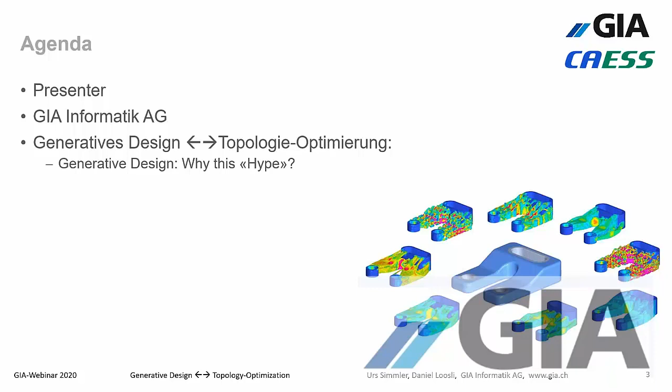I set up an agenda. My name is Urs Simmler. First, I will talk a little bit about me, about GIA Informatik AG. I'm working for this company. Then let's have a little overview about generative design compared to topology optimization, and most of the time we will see live demonstration in a topology optimization solution, which also provides some capabilities to do, let's say, some generative design. And at the end we'll have time to answer your questions. So if you have any questions, please write them into the question panel in the webinar application.

Okay, here is the presenter. My name is Urs Simmler. I'm working for GIA Informatik. I'm doing quite a lot of simulation stuff. Before I started working at GIA Informatik, I was for 20 years at PTC as a simulation specialist, and I'd like to show you some news about topology optimization and generative design.

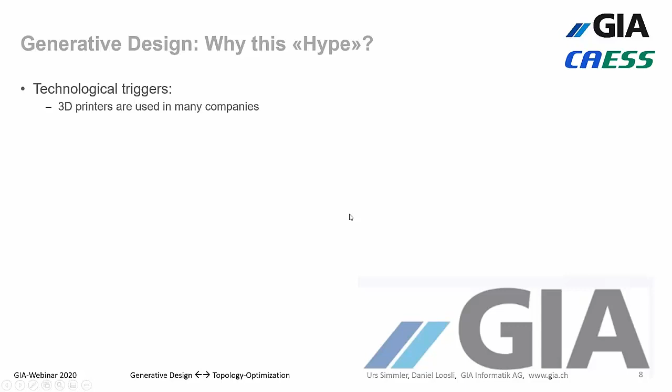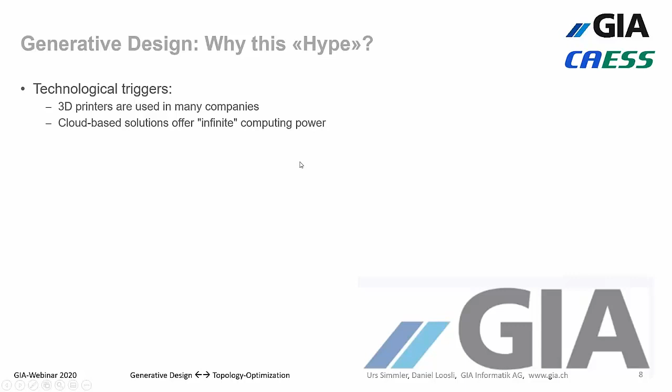Okay, but let's have a look at our theme today, generative design compared to topology optimization. What are common similarities and what are the differences? Why do we talk right now quite a lot about generative design? I think one reason is because many companies have 3D printers in-house and they want to use it, they want to feed it with new material, with bionic structures coming out from topology optimization or generative design. And of course, we'll see quite a lot of cloud-based solutions, and the cloud-based solutions provide infinite computing power, and that's also a reason that we talk quite a lot about generative design.

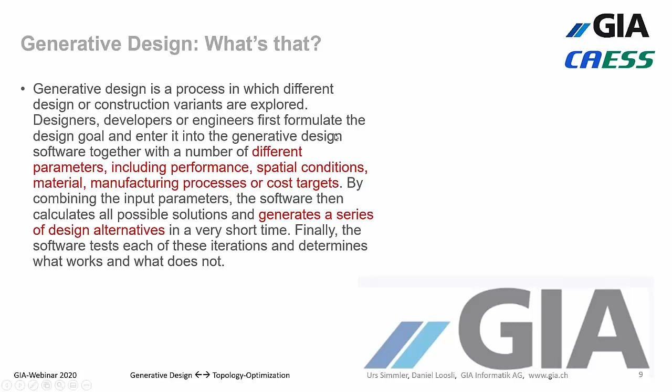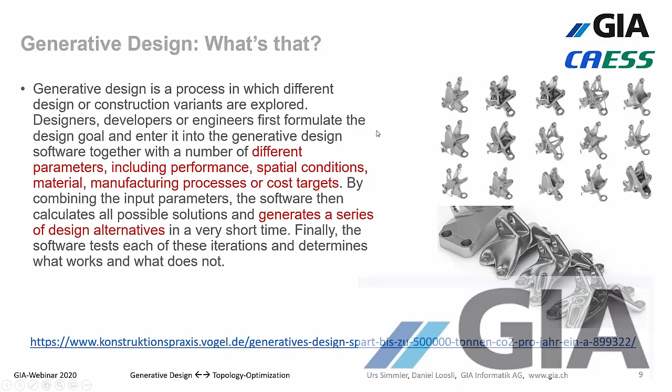And let's say the differences and the similarities to topology optimization are here, but they also have some common targets. Both of them want to create more efficient, better components, lightweight components, stiffer components. And I would say generative design builds on the principle of topology optimization. Topology optimization has been on the market for a long time, 30 years, but generative design came out with cloud solutions starting around 2015. Topology optimization is more a desktop solution, and generative design is in many cases a cloud-based solution because we need a lot of simulation power. And traditional topology optimization brings out one single optimized shape.

And if you compare it to generative design, there we get an infinite number of designs. And of course, both methods take into account manufacturing methods. There is no difference between them. And I would say topology optimization is more user-driven and generative design is a more computer-driven solution. And I think that's a nice advantage of generative design. Quite a lot of them are also using AI, artificial intelligence.

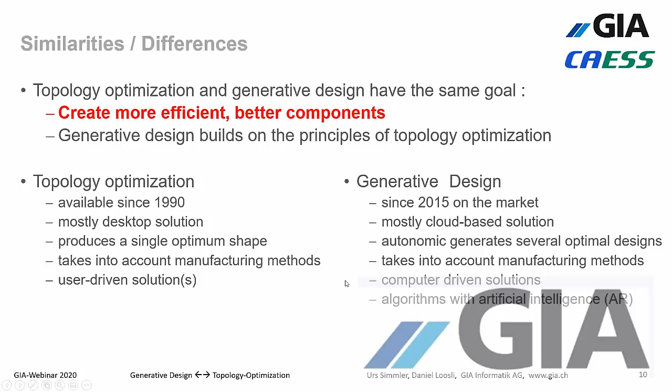Of course, in one or in two pictures, I would say the old way, yes, it's not that old, but it's a traditional way. There is one man, one computer, and you get one optimized design for topology optimization. And if you're looking at generative design, you must have a cloud solution. You must feed your cloud solution with artificial intelligence algorithms and of course with some CAD geometry, and then at the end of the day you'll get many variants of your design.

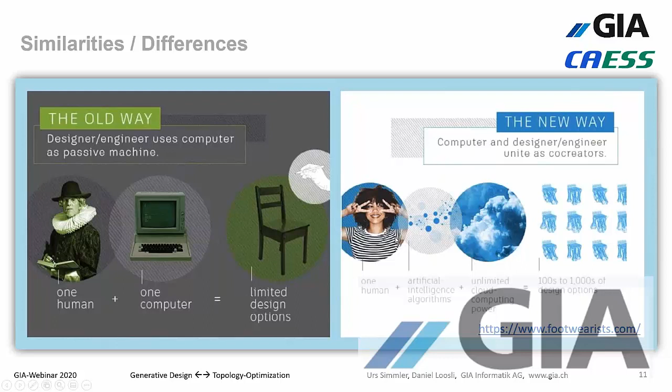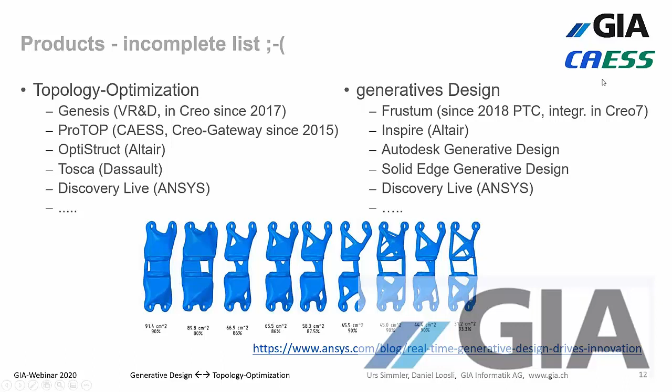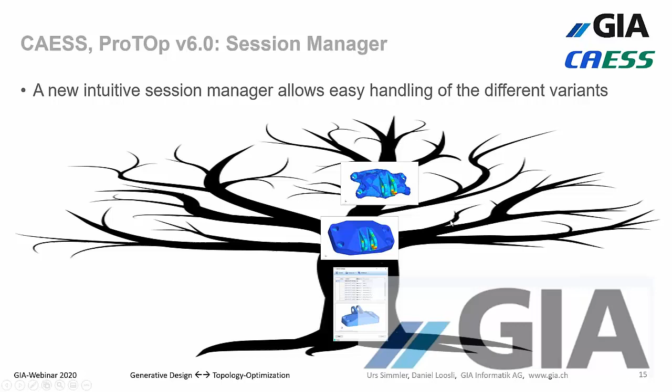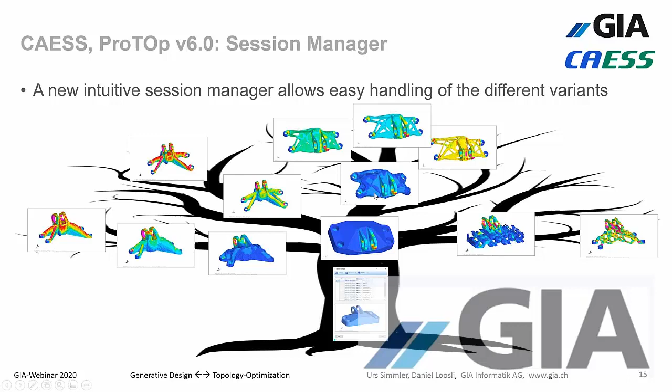But is there maybe a possibility to use the advantages of both technologies? I think yes. With ProTop we can do that, and also with different source data coming out from different CAD systems, because ProTop can be fed with simulation data from PTC or from CATIA or from SolidWorks or Siemens NX or what else. And with the help of the intuitive session manager, which came out in the new version, we can really go into the direction of generative design, we can really create many variants, and it's quite easy to handle them. I will show that quite soon in a live demonstration.

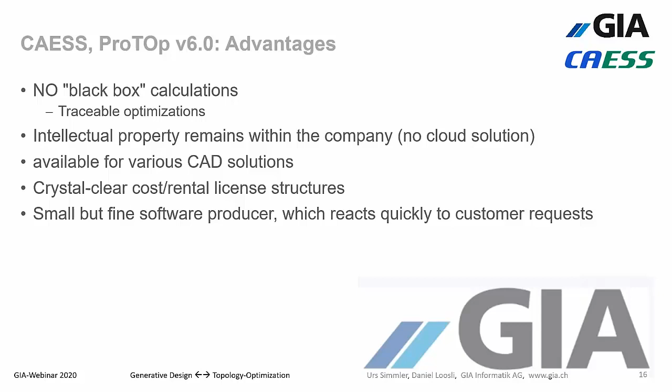And I think the advantage of topology optimization is that we really have a traceable optimization process. We can take influence on it. And one important thing is many companies do not want to send their intellectual property to the cloud. They want to keep their intellectual property, and ProTop can be fed with CAD data from many solutions. You have a crystal clear cost license structure, and by the way, you have a small software factory which can react very quickly on new customer requests. And we'll see the solution is very quick. I'm working with an old laptop from Lenovo, P50, 3.5-year-old laptop.

And we want to have a look at an example where we want to build several variants of a bracket which will be loaded here in these directions. We have 2 load sets, and it's constrained here in that region. And of course, at the end of the day, if we had a little bit more time, we'd get these kinds of variants here. But let's start from scratch with our CAD system, Creo Parametric.

I opened Creo 6.0, and here in Creo 6.0 I designed my design space for my optimized part, and in the Creo Simulate application, in the FEM mode, I just created the simulation features. I created some loads and constraints, so it's constrained on that surface. It's loaded in that direction. This is one load case, and it's also loaded in those 2 directions. And of course here I set up mesh control. The maximum mesh size should be 1.75 millimeters.

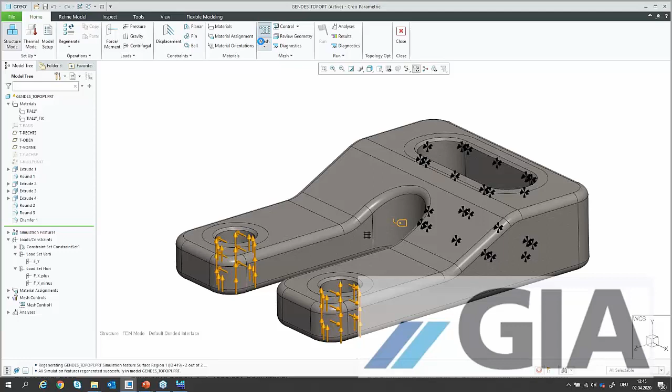I assigned a material here, and I assigned a special material for so-called volume regions. This volume region should not be optimized. This is material which cannot be removed later on by the topology optimization. I'm going to mesh my component. This is taking about 10 seconds. And we'll see here quite a dense mesh. It's needed for topology optimization. This is not Creo Simulate native mode. This is FEM mode where we create that.

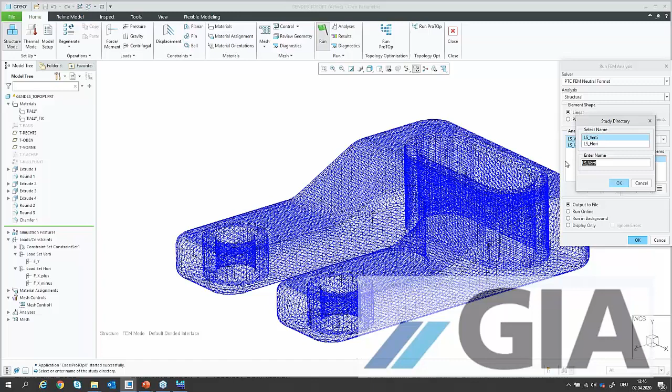And with the help of Pro/TOOLKIT we can also make the gateway with ProTop. I just brought in these buttons here. I could push just that button to send my data to the solution, but I will do it by hand, as you can do it also with other CAD systems. Here I just have to write out an input deck with linear elements. I will write out structural FEM format, and this should be done in a folder called, what should I call it? I call it Max. Okay. And now a file will be written out.

I'm going for my folder here, under the data, and we see there's a folder Max created. I'm getting here an FNF file. This is a traditional input deck for finite element solution. At the beginning you have some nodes, then elements, and at the end forces, constraints, and material information.

This file can be taken now by a topology optimization solution called ProTop 6.0. Here I just open a new project. Under the folder Max, I'm going to open my FNF file, and this will be imported here.

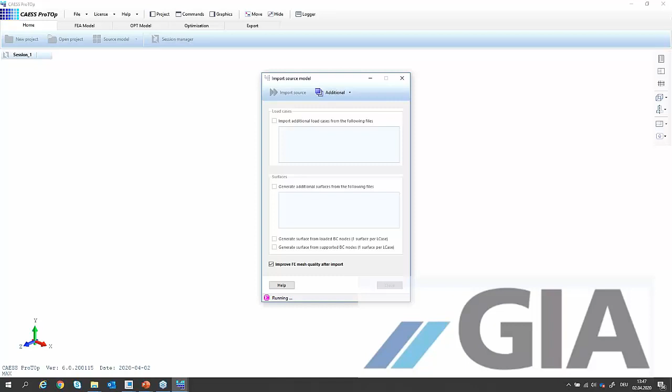So I'm getting information about my design room, about the loadings, about the constraints, material information, and quite soon I will bring in some additional information like technological constraints or all that kind of stuff. Here we can have a project folder, commands can be taken out and so on. It's quite easy to use that solution.

And the most important thing is here the session manager, because with this session manager it's really very, very easy to organize my variants and to go into the direction of, let's say, generative design.

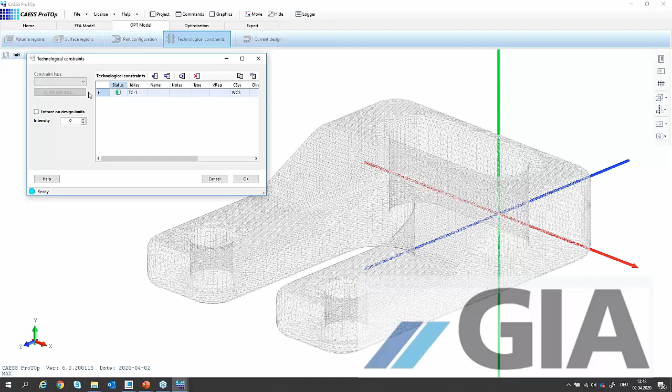So the first thing I'm going to do, I'm bringing in a very easy technological constraint, and with this technology constraint I want to do the following thing here. One moment, I want to create one here. Okay, and it should be a plane symmetry here.

Which volume should be symmetric? Let's say the free volume, colored now in green, should be symmetric to a specific axis, and as you can see it should be the x-axis. We see here this purple plane, blue plane, it indicates the plane symmetry.

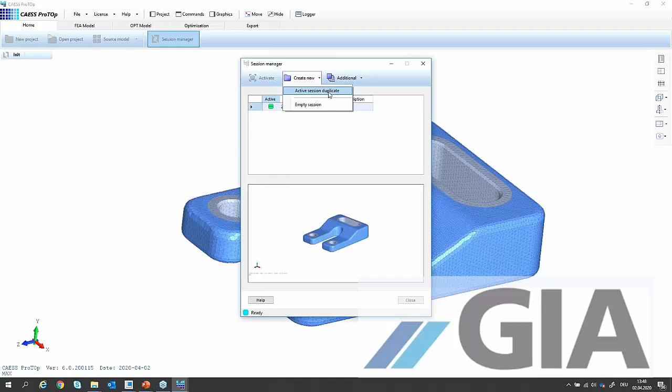Okay, so this is our initial design, because at the end we want to have all our variants symmetric. I'm going for my session manager and I'm creating here a duplication of the active session, and I call it, maybe this is 3D printing, and this should be a very coarse solution here.

Okay, and I'm just hitting here the button. I want to optimize here. I want to perform a topology optimization. Just started it here. I'm going to take away the material quite aggressively, and in that region here I can say, okay, I want to see the geometry, or the stresses, or the displacement here. So it's already calculating.

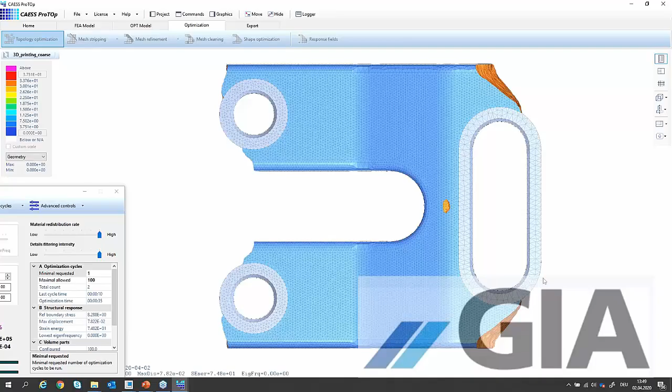Here are the stresses, and depending on the high stresses, ProTop cuts away the regions not needed here. Of course, these regions are not needed for stiffness. Also this material is not needed for stiffness, but the gray material cannot be cut away.

So every 10 seconds, a new cut will be done, and the number of equations are getting less and less. My initial target is I want to reduce the free area to about 50%. I want to bring it a little bit more down because I'm quite close to 50%. My target should be right now, I want to have 20% here, around that one.

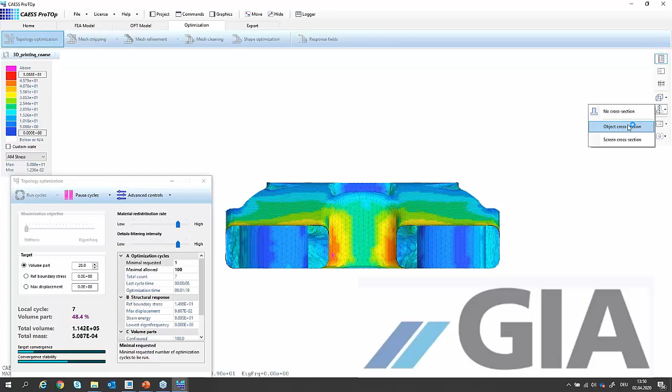And you see, when I'm looking maybe here from front, by creating a cross-section, okay, I can see in my cross-section, I can move that during the optimization process to see what happens. In my component, I can see a bionic design will be created, and for sure this kind of design has to be 3D printed.

So I'm deleting my cross-section, and we can see right now we are around 25% after 12 loops. And the design looks as follows here.

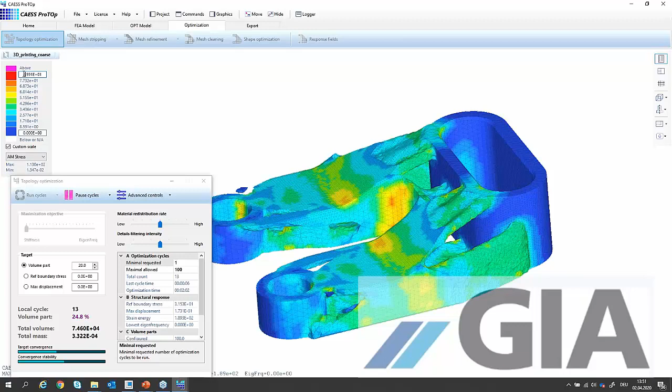We can also bring in our stress legend here to see where we do have the high stresses, where we do have the low stresses here. And I would recommend at the end of the optimization, you should take a little bit less aggressivity here. Yellow means less aggressive, and red means more aggressive, with these two sliders.

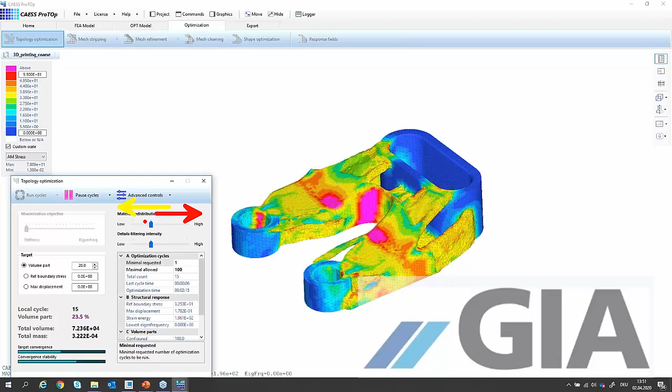Okay, so I'm taking it quite smooth away, and I say, okay, now I want to stop my optimization process. And I think it's also quite important that you see during the optimization what's going on, that you can see the stresses, that you can really influence the optimization process. If you have a generative design solution, you have no clue what's going on behind the scenes.

So right now I have my coarse 3D printable component, but I want to take out some more material. For that reason I would say I need more elements, and therefore I also have the capabilities within ProTop to do a mesh refinement.

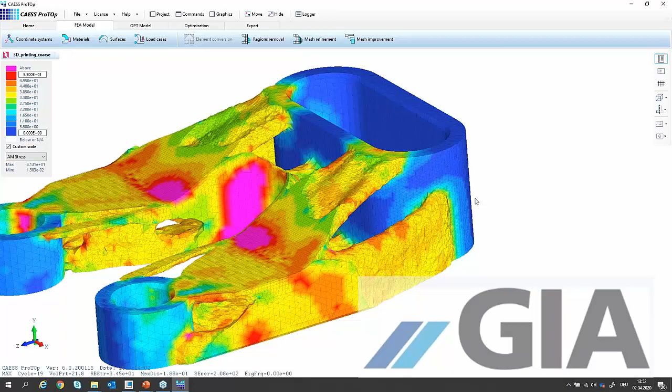I do not have to go back for my CAD system. I can refine the mesh here. With these numbers I say, okay, I want to subdivide the elements above an edge length of 1 millimeter, but I don't want to use more than 7.1 gig of RAM.

Now the refinement will be done, and I'm getting here a new session. So automatically a new instance will be created in my session manager. I can always go back for the old session with the coarse elements, but now I want to proceed with the dense elements. The meshing process is still on the way.

Maybe let's have a look here at the elements in that area. Okay, and quite soon we'll see that these elements will be divided. I hope. Yes, it's doing it right now. Okay, now I have a much more dense mesh, and I will do the optimization.

I will proceed with the optimization, and I will bring down my target to about 12-13%. At the beginning I say, okay, I want to cut out much more.

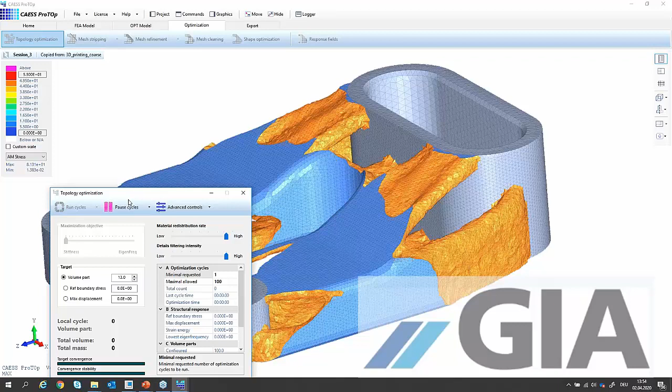Going here maybe back for the geometry. Yes, we can see the geometry here. But now we have the design room with very, very dense elements. And of course, stresses will be created quite soon.

We'll see that the cycle time is coming up a little bit because our number of equations increased. And we see right now the stresses, and now every about 25 seconds, let's say, another cut will be done. I'm cutting away quite aggressively right now.

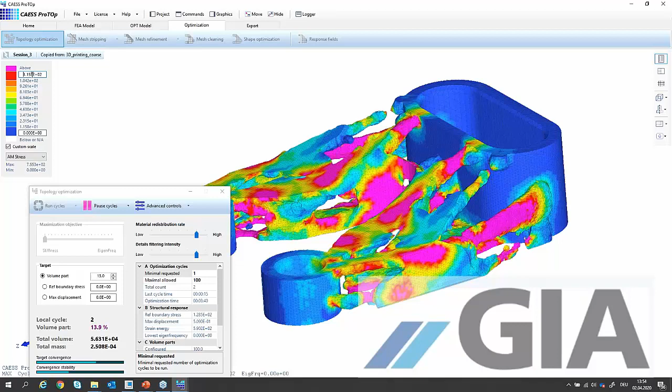Let's do it a little bit smoother here. I'm using my custom scale maybe to have stresses between 0 and 100 megapascal. Let's go here a little bit up. You can also use the mouse wheel to do that.

So you see right now I was in between. I was a little bit too aggressive, so it cut away this bar here, but that doesn't matter. And I can see what's going on right now.

Okay, now a design cycle takes around 15 seconds, and I'm getting here, let's say, a new instance of my geometry.

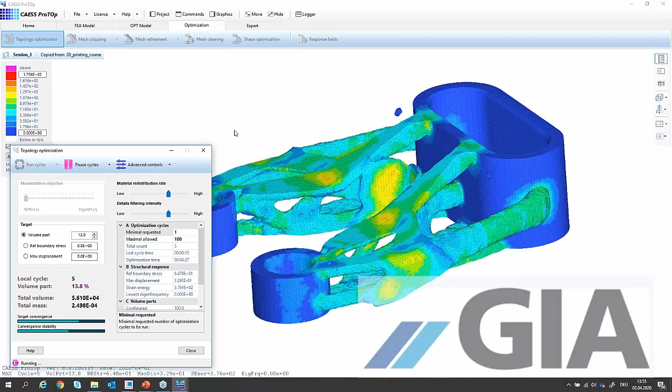Of course, in reality, you have to spend a little bit more time on that, but I will show you later on a solution which took about maybe 40 minutes to create. But I'm quite happy now with my new instance here. It looks quite interesting. And I'm stopping here, let's say, the solution.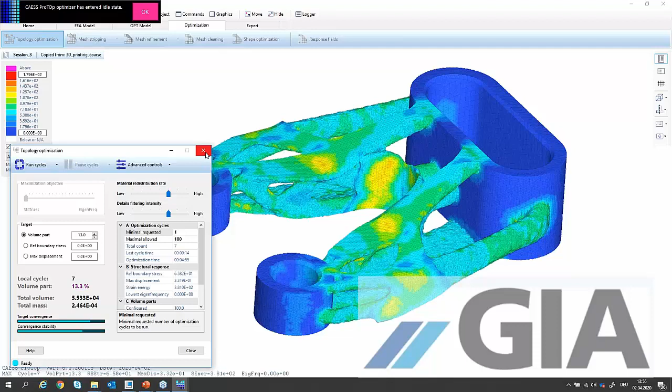You can stop it here by abort immediately, or now it finished, let's say, the last cycle. Okay, I'm having here right now a new solution. This has to be 3D printed.

But now I want to create an additional instance. I'm going for my home tab. I'm going here for my initial variant, and I'm copying the initial variant. I'm duplicating it. So okay, this may be the

variant I want to create with a laser option. And therefore I'm bringing in here additional technological constraints by maybe copying one. I can say, okay, I want to bring in an additional constraint, which is, oh, I don't know what here, I do not understand this option. Therefore, I have a nice help which explains everything to me.

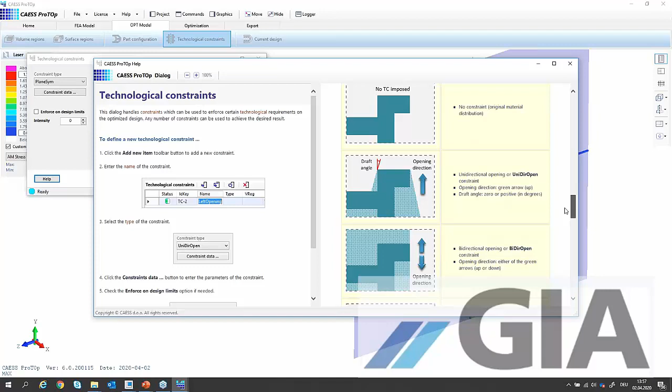And I'd like to create here a bi-directional open constraint. Okay, that means it can be milled or lasered. So I'm doing here bidirectional open. Of course here that one bidirectional open. And I want to use the same constraint data.

No, not really the same because my plane has to be changed. It has to be perpendicular to, let's say, this plane here. Okay, and with this new technological constraint, I'm going back here for my topology optimization and I run it again.

Maybe you noticed here that I still have, or have again, let's say, the coarse mesh in order to pre-optimize my component. Later on, if I really want to optimize, then I'm bringing in an additional dense mesh on it. Of course, we see here the stresses, and at the beginning I want to cut away the material quite aggressively.

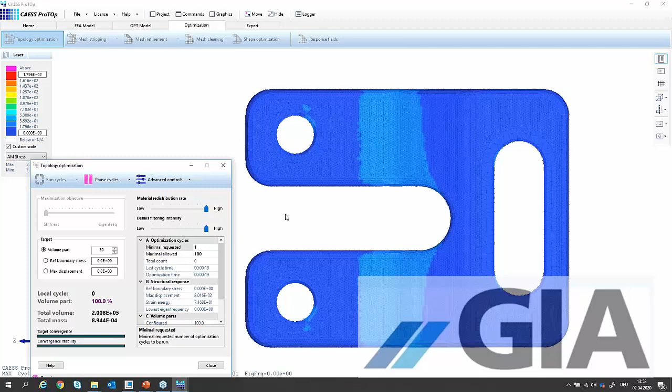Okay, this is done right now, but now you see, okay, the cuts are here in an order that we have like a laser option here. So the cuts, or it will be milled, or I would say I'm using a laser to take out the material. Okay, our target should be, we want to go in the direction of

35%, something around that. I'm reducing the aggressivity, and I can see here some cuts, of course, and later on to create such a component will be quite easy because you just can, let's say, bring in sketches with that cut shapes in your CAD system.

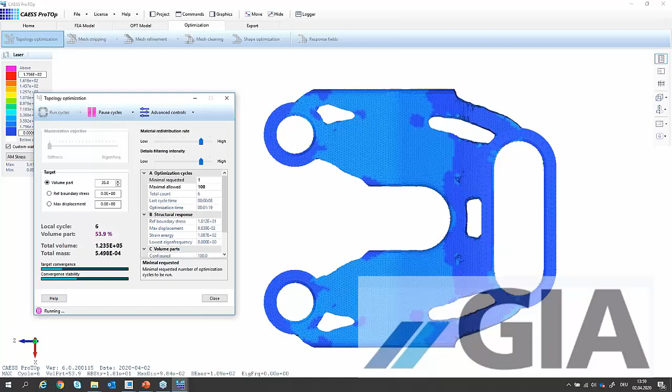Okay, we have here the solution. We can bring down the stresses or the legend levels with my mouse wheel, and I can really see what's going on in my part. Of course, it makes sense to do it a little less aggressive to get a nice solution. The sliders are moved to a position depending on the density of your mesh inside the component.

But we see a very interesting solution here which can be milled. I would say we understood this principle. I'm going to stop this run here, this variation creation. It's doing the last cycle, and I have here a nice solution.

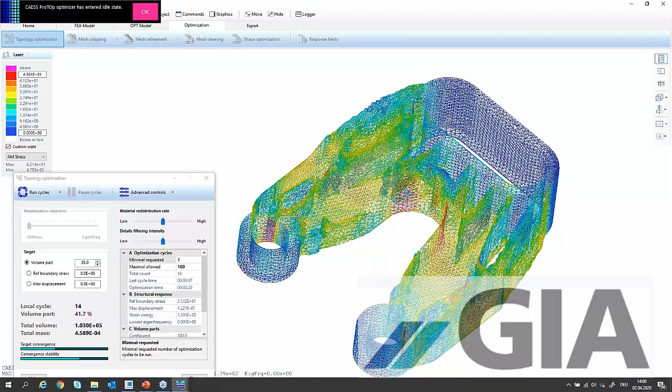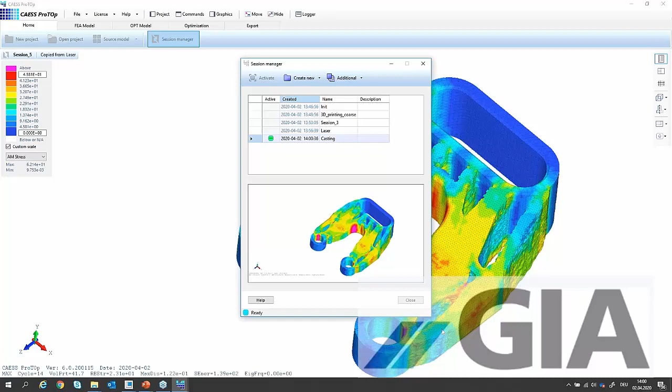Okay, but now I want to create a solution which can be casted. Going back to my session manager, I'm creating an additional copy here. I say okay, this guy here is casting. Let's delete this information. Okay, and you see here the old solution, but casting is right now with the standard.

If I would start here with my optimization model, it would start with the pre-optimized model from the laser option. But by taking the configure design and making it current, it will start from scratch again, of course, using also the technology constraints.

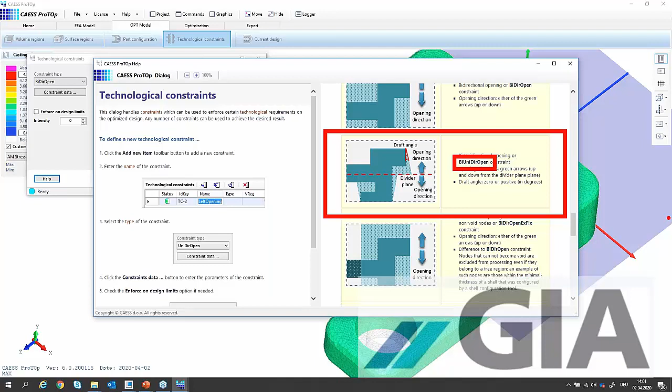I'm going to change now my bidirectional open technology constraint to a constraint for casting. I can see in that nice help that I should use bi-unidirectional open. So quite clear for me, take here bi-unidirectional open. And the constraint data is nearly the same.

The only thing I can bring in is an additional draft angle. And maybe as an additional feature, I'm moving up my plane for the draft angle to a level of 7.5 millimeters.

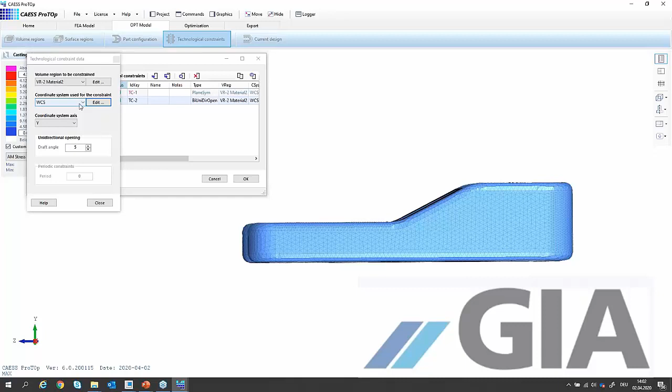Therefore, I'm creating a new coordinate system, and I'm moving that coordinate system by 7.5 millimeters here. Okay, you see it moved 7.5 millimeters, and I shouldn't forget to activate the new coordinate system. Now here, starting from that plane, we should see draft angles of 5 degrees.

Let's check that by starting topology optimization again with the same target, starting from scratch with the full model. We will see that it's cutting away. Maybe we can see it a little better from that view. Okay, let's use that view.

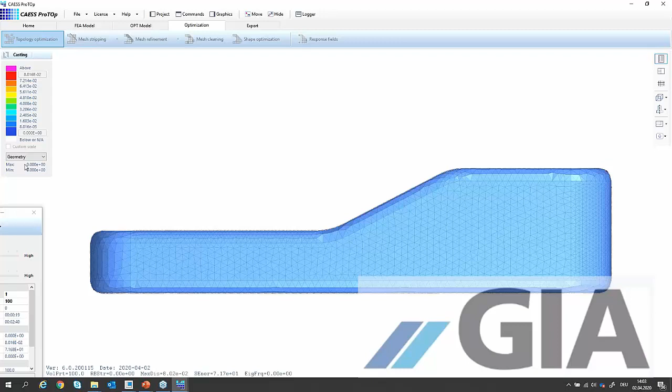Let's see maybe the displacement. Let's see the geometry here. And now it should cut away a little bit. Let's do it a little more aggressive at the beginning. Okay, and here we can see there is draft angle.

Okay, now we see it better. Here we see we have the draft angle until here, or here we see it better, here and here. And of course, if you are watching our part from top, now we are watching from top, we see that we can pull away the casting form here. Okay, so also interesting.

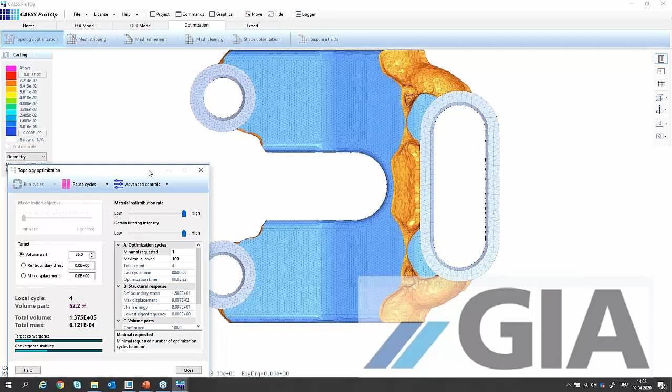Geometry will be created. Let's do it a little less aggressive. Okay, and if you watch from bottom or from top, we see very, very interesting bionic shapes. Geometry will be created, around 39%. Oh, that goes very, very fast.

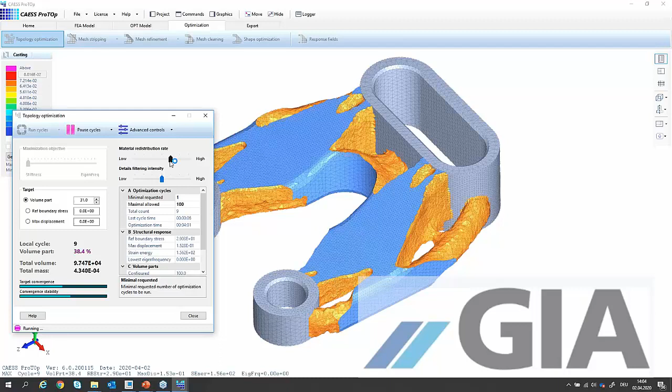And I would say we're going further down to a target of 31%. Of course, you could also use as a target the boundary stresses on the yellow surfaces here, or you could set as a target displacement on your part. Okay, we have here this kind of solution.

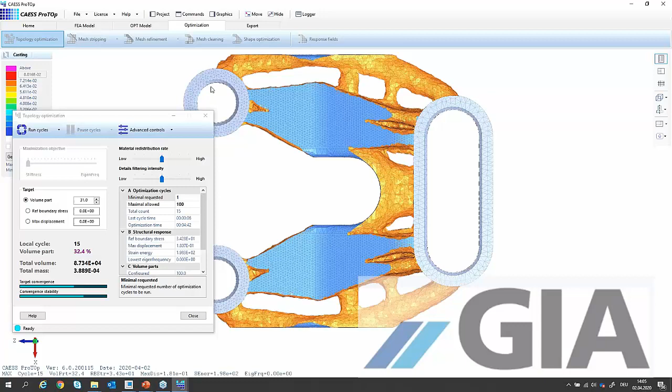And we pause our optimization process. Of course, an additional mesh refinement can be brought on that geometry to do the final optimization. But now I want to create additional variants here because I have a 3D printer. I want to use maybe some so-called lattice structures.

And to be able to do that, I'm going back to my session manager. I'm activating my initial design room, and I'm copying the initial design room. Okay, and this should be a 2D lattice variant.

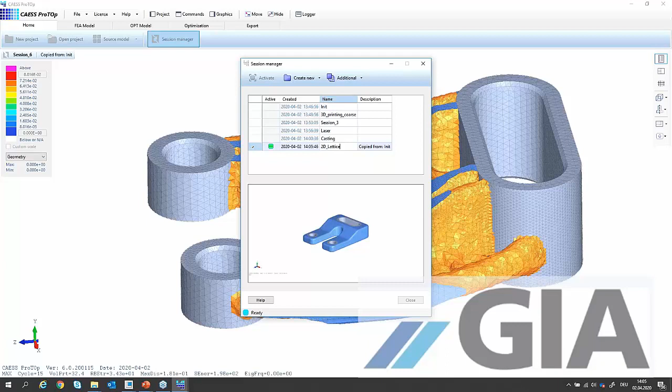Okay, because I started from initial here on the optimization model, I only have my plane symmetry constraint. Here I could also suppress or activate them. Now this plane symmetry is activated, it's green, and I'm creating a new so-called part configuration. Here I have a capability to create solid, shells, and lattice configuration. I'm using right now a lattice configuration.

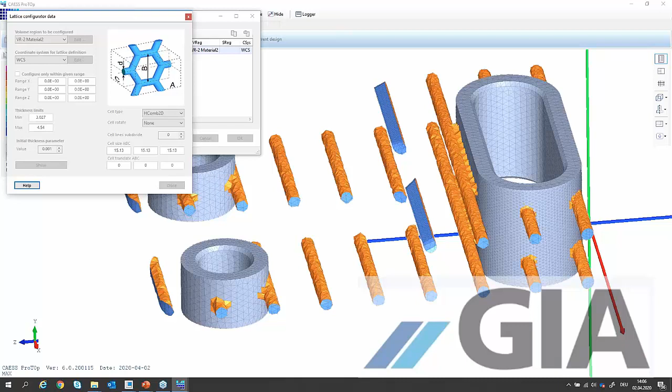And which kind of lattice do I want to use for this green region? This one. No, this doesn't make sense. I want to use here maybe a 2D honeycomb solution. I'm showing then. Oh, in that direction doesn't make any sense. So I spin it around the A-axis. Then it looks like that here.

And as soon as I'm bringing in here in that direction a 0 value, an extrusion will be created. And maybe I'm using a cell size of 15 to 15 millimeters. Okay, it's looking like that here, looking from top. And of course here I'd like to have a closed loop of that cell. Therefore I should move my coordinate system a little bit, and that can be easily done by bringing in here a cell translate of, let's try 8 millimeters. Okay, and this looks quite nice.

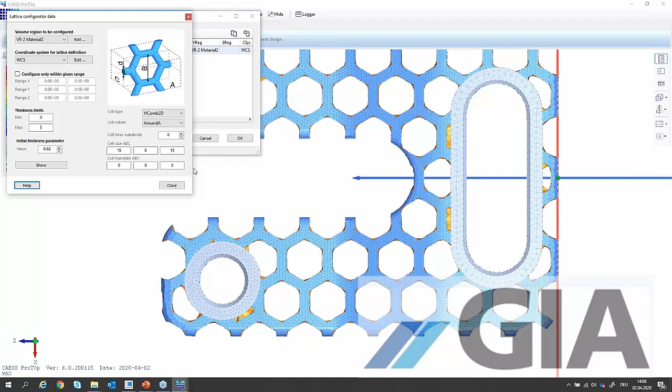I'm defining maybe here a maximum thickness. This is the cell thickness of 5 millimeters, and by bringing in a minimum thickness limit of 0, the cell can be taken away. Right now I see the maximum value here, and by bringing out the initial thickness parameters I can bring a little bit less material for the starting position.

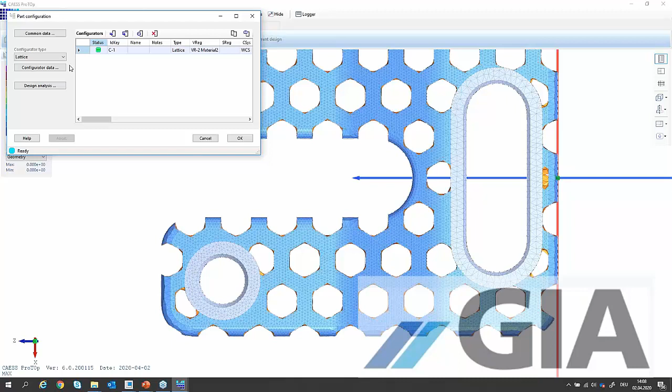I'm starting with the full model here, okay, and now I'm going for my... will be cancelled. I have to, okay, one moment, common data, configuration data. Now everything should be okay. 05, okay. Everything okay, and I can see here on the current design, I'm analyzing my current design, I can see my configured design, I can make it current.

Okay, and I'm starting again my optimization here. The target should be around 24%, and I'm running the cycle. Of course, now my design room includes around 58% of the elements, so my calculation will not take that long. So one cycle takes around 10 seconds.

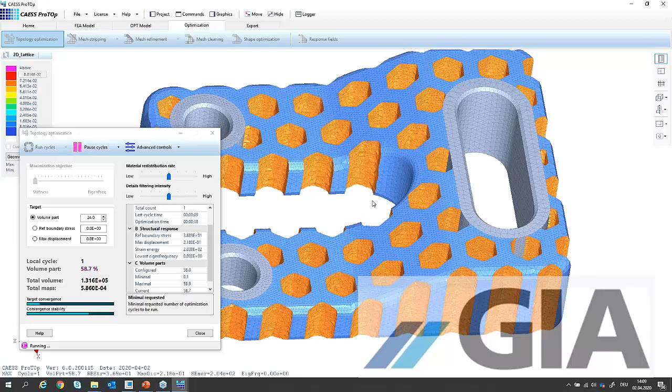But quite often when you have these lattice structures, it takes at the beginning 2 or 3 cycles until you really see where it's starting to cut, because it's quite difficult for ProTop to find out where are the areas where it can start to cut away the material. Of course, you see here a slight change of the volume of the free area, and quite soon, I hope. I cross my fingers. Yes, I think it starts right now here. It takes away the material in that region. Of course, in that region no material is needed.

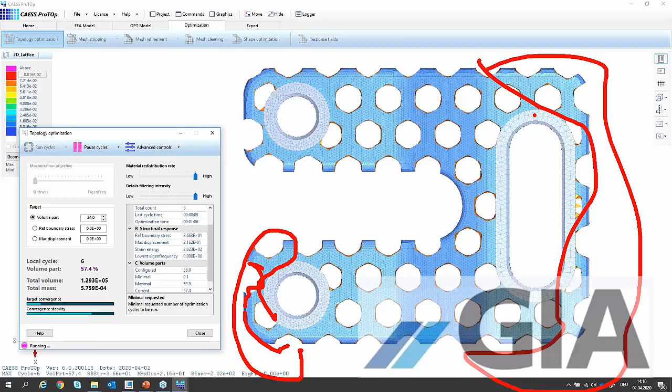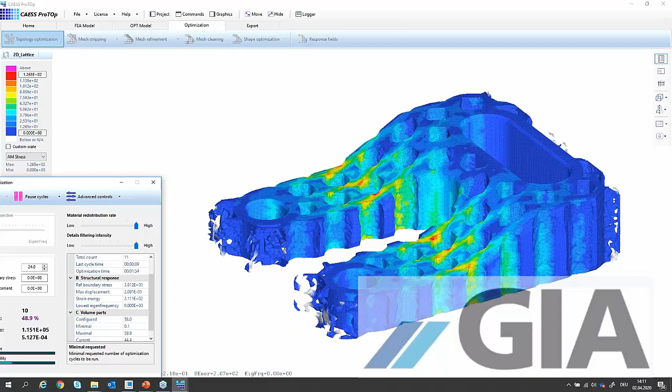Okay, next step. Local cycle 7, taking away additional material. Now, come on. Now you see here the thickness of the lattice structure is removed more and more. And of course during simulation we can see the stresses or displacement or what else. And we are creating right now an optimized part with a 2D honeycomb lattice structure.

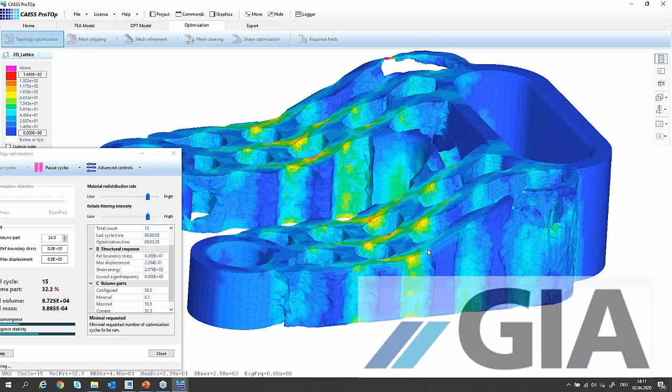Okay, target 24%. Let's be a little bit more careful. Okay, and let's watch here the change of my design. And I think quite important is that you really can see what's going on in that optimization. You can take influence. During the optimization, you can change your target. You can go back to a certain variant or a certain cycle and start again from this cycle.

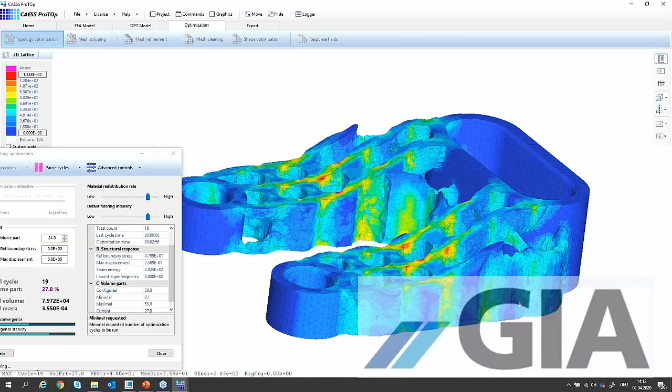So there is really a big flexibility, and as I mentioned before, you do not need a cloud solution or infinite calculation power. An old laptop with at least 16 gig of RAM is enough. Now we see how ProTop is cutting away the material, and it's creating in that area quite interesting lattice structures.

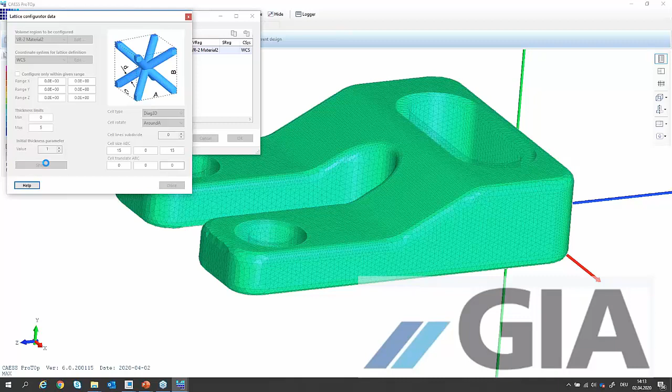Okay, I think we understood that thing, and I'm stopping here again, and I want to do the last variant. Therefore, I'm going back to my session manager. I'm duplicating that one. Okay, and I'm changing here the part configuration. I want to use another lattice. I want to use the 3D lattice, this one here, with switch options, something like that. Let's do here 0, and let's show it. Yes. Is it 3D?

Yes, I forgot here to bring in that value because I want to have really 3D. Okay, and now it's looking a little bit more interesting. Okay, and I just want to use this configuration to start over. Therefore I'm going for my current design. I'm going to analyze it. We'll see, let's say, the pre-optimized design from the last session. By clicking on that one, configured design I want to start, and I want to make that current.

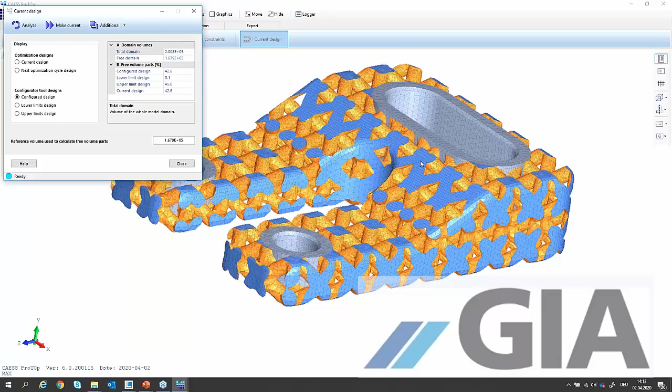We'll see, okay, that's looking quite interesting, and therefore I'm going back for my optimization tab, and I'm running the cycle again. Okay, and I will see, let's say, the same behavior here. In the meanwhile, I'm going back for my Creo Parametric and just want to show you that one here. So I did the optimization in ProTop. I loaded here, let's say, the half of my faceted design, and by using a freestyle feature, I created, let's say, this area here.

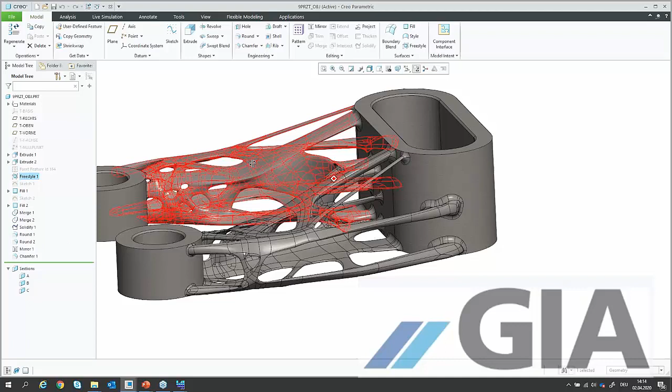And of course, then I made a solidify. I mirrored it, and it took me about half an hour to create out of that faceted model this, let's say, freestyle model. And also this freestyle model, I was taking it into Creo Simulate.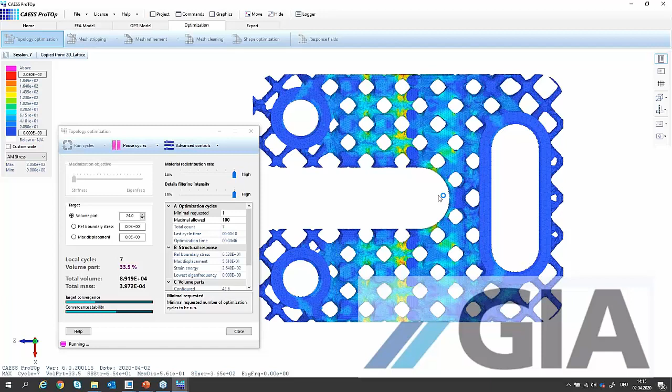And here under, where is it? Under applications, a moment, simulate here. We can see also the results. In the meanwhile, ProTop is cutting away here, let's say, the areas not needed. Oh, it took a while, so I can go back for Creo Parametric, and that was the wrong one. I went to the old topology optimization of Creo Parametric. I want to go for Creo Simulate. This is the button I was searching for.

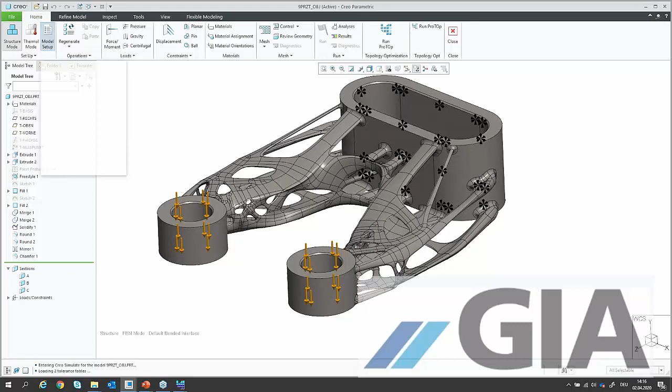Okay, and here, out of my analysis I created, I can see here also the results. Let's do here the results. Oops, that was the wrong mode. This is live demonstration, so I have to change the mode here to native mode. And then in native mode I can see here the results. Sorry for that confusion. And let's see here maybe the stress results. They will be loaded. Okay. This is, let's say, the validation calculation in Creo Simulate.

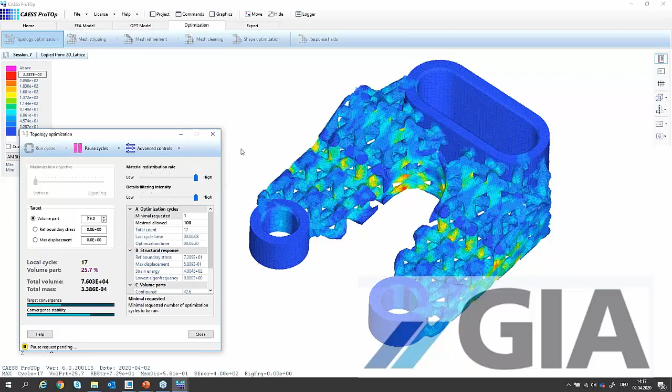But in the meanwhile, yes, it's cutting away the materials, and we are quite close to our target of 24%. And here we see these interesting lattice structures. Okay, but that's all for doing generative design with the topology optimization solution from ProTop. So I'm stopping this solution, and I think you saw that it's quite intuitive creating these different solutions by using this session manager. With the session manager you really see what's going on, and you can take additional projects, copying them and starting over with them.

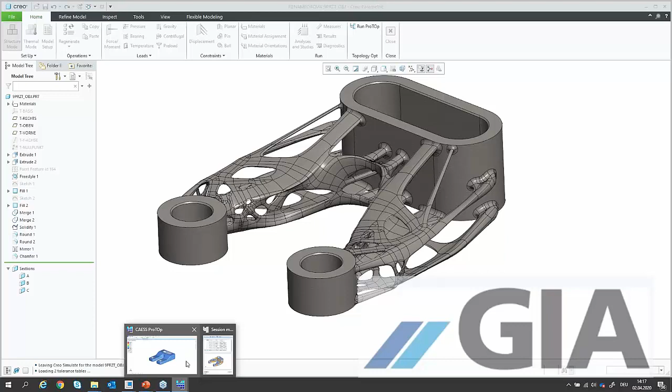As I do it right now, I'm opening a project here, open project. I did that, I think it was Tuesday. I called it live, so opening the live project, and here we also have the session manager. And I see this is the solution I showed you before in Creo Parametric. So I just click on that one. It's active. Okay. And I say right now, let's go for optimization. And then I see this behavior, and I can start over.

I can add here material, or all that kind of stuff I want to do is possible. So I run the cycles again, and I say, okay, I want to create here maybe a new instance with more material. Therefore, we'll see quite soon an additional step here, and I hope that we'll see that it's adding material. It is taking maybe 20 seconds. And so it's really very easy to handle all these different variants here. It's running.

Let's wait another 5-10 seconds. Come on. Let's do that cycle. This is really live. Here I can abort it if it's taking too long, but I'm waiting another 5 seconds. 1, 2, 3, 4, 5. So I'm aborting this process. It's taking a little bit longer. Don't know why. Okay. And I'm going back for the Home tab.

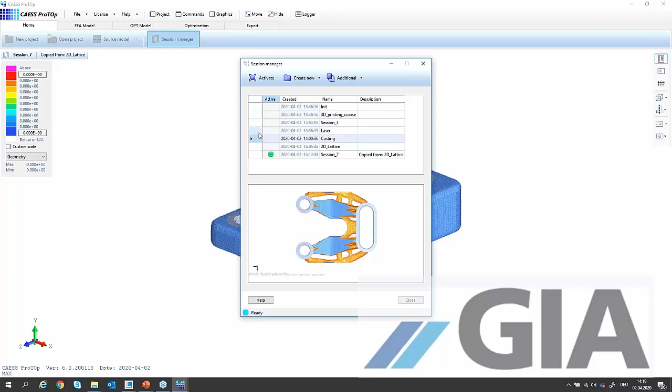I'm opening the project Max. Okay, and in the session manager here I can see maybe the initial one or the casting one. Or which one? Laser session. I'm taking that one. This one I like, so I'm activating it. I just want to bring over that geometry. That geometry should be taken back to the CAD system. I just say, okay, I want to smooth the surfaces. Okay, checking those surfaces.

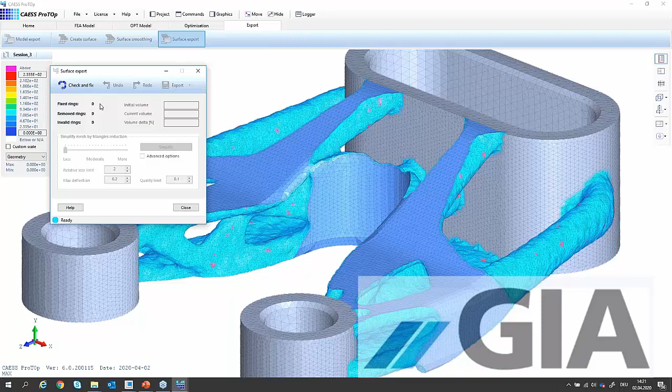Okay, I'm zooming in a little bit. I'm selecting the surfaces and I'm going to remove some peaks. Okay, refine some triangles. Smoothing the surfaces a little bit. And simplifying the surfaces a little bit. So, okay, I'm satisfied with that one. And I'm taking the step to export the surfaces. I'm checking them, and I want to export them.

Export surface, Max, STL, save on the data. So now I hope it's created, and let's create also an OBJ file, saved on the data.

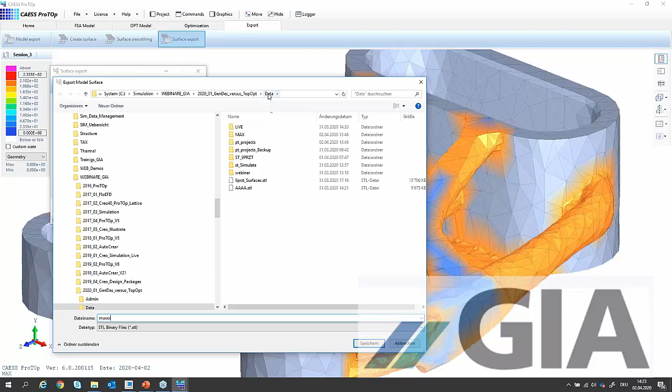Oh, it's going to max. So now I see why it didn't work. Okay, so, stupid guy, sorry for the confusion. Export surface again for STL. And let's do maybe max STL, and on the data it will be created right now. Now it worked. And I'm going back to the CAD system.

Okay, and here I could just say, okay, I want to open all objects. And here we see the STL file. Okay, a new component will be created. Of course, if I had taken, let's say, the dense mesh, it would look much better. But with the help of that one, I could, let's say, recreate my part, or I can do the following

thing here. I'm creating a new component, and I'm going for the freestyle option here, and under the freestyle option there is a possibility to import the OBJ file. Okay, and this guy will be taken into Creo Parametric, and then you can, let's say, take them and delete some surfaces, move some points with the freestyle option. This is also taking about 2 or 3 minutes.

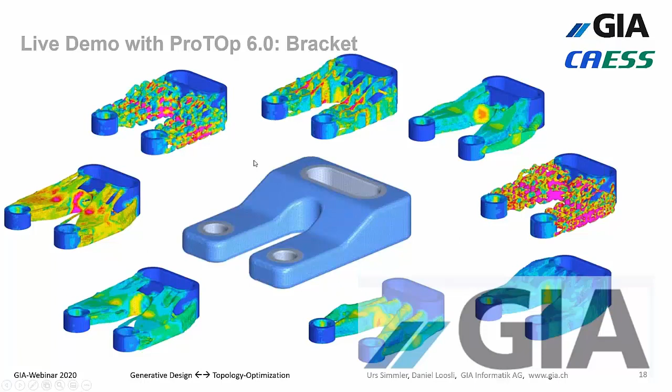Therefore, we are at the end of the live demonstration. We saw how we can really create a lot of variants in ProTOp with the session manager, and that we really have a solution where we can do topology optimization and generative design on a simple desktop without sending, let's say, our critical data to a cloud solution.

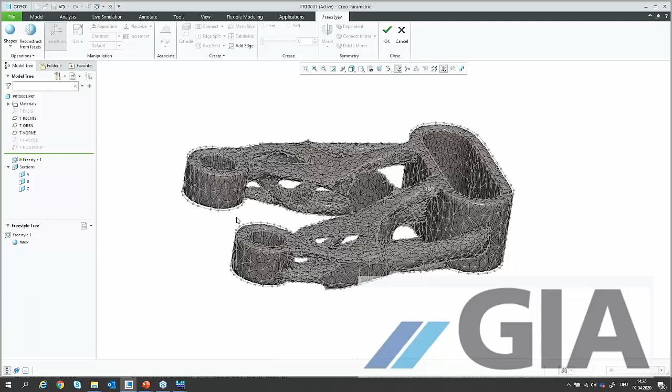In the meanwhile, I can maybe watch this guy here, still creating the surface, as it created it right now. Of course, right now we have quite a lot of, let's say, small cuts inside, but I would say it's not that bad here. And with that import in freestyle here, we can do, let's say, the validation calculation. We can really use that guy for further investigations. Okay.

Let's go back to the PowerPoint here. Let's have a look at the questions. There are questions: how many processor cores can be used efficiently? Right now I'm using all, let's say, the cores. I'm not sure whether there are some options where you can say I just want to use some of them, but especially during, let's say, solving

of the equation system, all of the cores will be used, and that's the reason why this solution is very quick even on an old laptop, and therefore I think it's really a very cool solution. And another thing is it never crashes. I'm working with it now for 3 years and it never ever crashed. You can do everything with it.

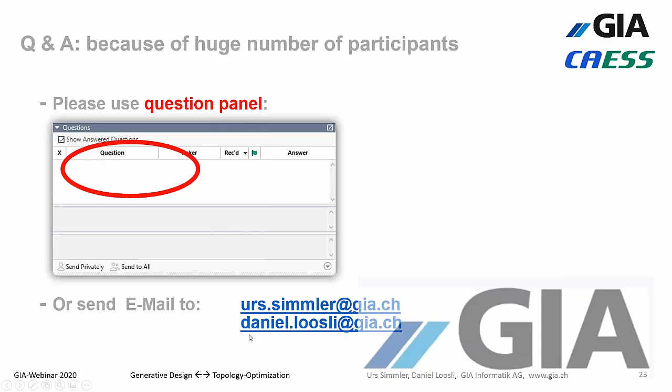I hope the webinar was interesting, that you saw the ProTOp solution, that you really can do topology optimization and generative design within one solution, and you do not have to send, let's say, your intellectual property to a cloud solution. That's all from my side.